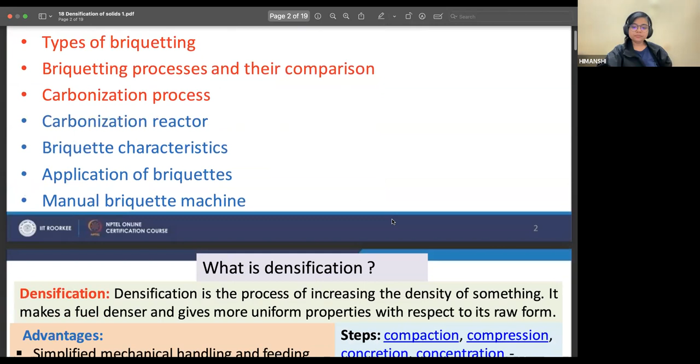So we will see what we learned in this week, and then we'll quickly jump to some basic questions which might help you in solving your assignment. So the first slide is basically densification of solid, and you have to help me out here. So what is densification? Can anyone brief me? What was densification? Anyone? You can type in the chat box, or you can unmute yourself and say.

Process of increasing the density. Okay, Rohan. And why do we need to densify, or why do we need to increase the density of the material with respect to the raw material? Any brief idea? What was the main reason for densification? To make it easy, ma'am, to process further. Yes, go ahead. Someone was saying something. Ma'am, it is just to reduce the logistic cost.

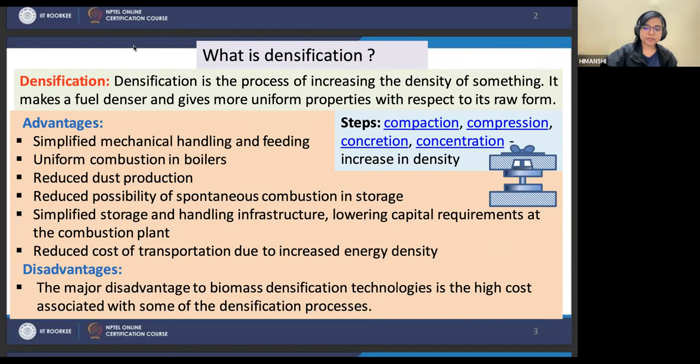And we know that some of them are very high quality machines, but as every high quality machine, they are very costly. Hence, we need to trade off between in which we need to put a major amount of money and in which we can compromise a bit, right? It's a very generic introduction for these things.

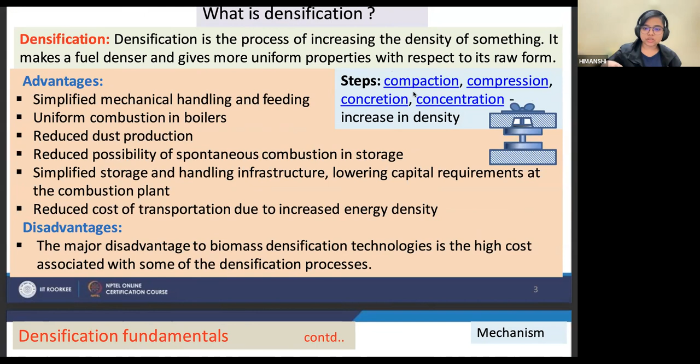So what is the mechanism of densification? Firstly, the first step will be compaction, compression, concretion, and then concentration, right? We will discuss everything in the coming slide. So the mechanism of densification is, can anyone tell me the concept behind densification? What happens when we are compressing or providing it high pressure? What is the basic principle behind it?

Why we are, yes, go ahead. Someone was saying something.

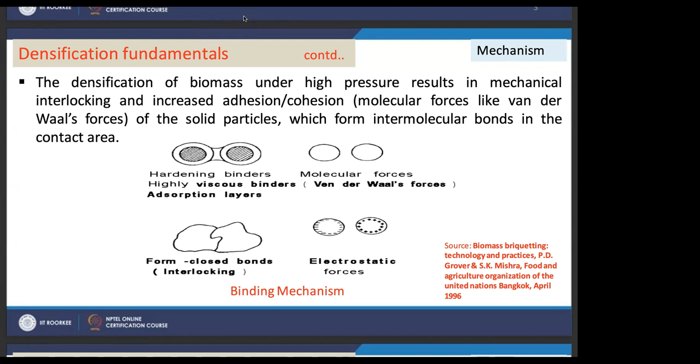Okay. So my question is, why or how does densification work? Suppose we have 1 kg of cotton and 1 kg of iron bar. Which is going to take more space? Will it be 1 kg of cotton or 1 kg of iron bar? Cotton. Cotton is going to take more space, right?

But if we put this cotton in a bag which is of dimension, suppose, 4 by 4, right? Similarly, the iron bar is also a bar of 4 by 4. So they both are going to take the same space at the end of the day. So what operations did we perform on the cotton for it to occupy less space? We pressurized it, right? We compacted it.

So what happens due to compaction or when we subject it to high pressure? The interparticle space, not intermolecular space necessarily, but definitely interparticle space reduces. We are excluding all the voids which are there between the particles, correct? So the densification of biomass under high pressure results in mechanical interlocking and increased adhesion and cohesion forces, such as van der Waals forces of the solid particles, which form intermolecular bonds in the contact area.

What are van der Waals forces? Can anyone tell me? And if you do not know how to explain it properly, just tell me whether it is a covalent type of force, or a non-covalent type of force? What kind of forces are van der Waals? And if you have no idea, please either raise your hand or text me in the chat box so that I can explain what van der Waals forces are. Okay, so no one is raising hand, which means you know what a van der Waals force is. So what are van der Waals forces?

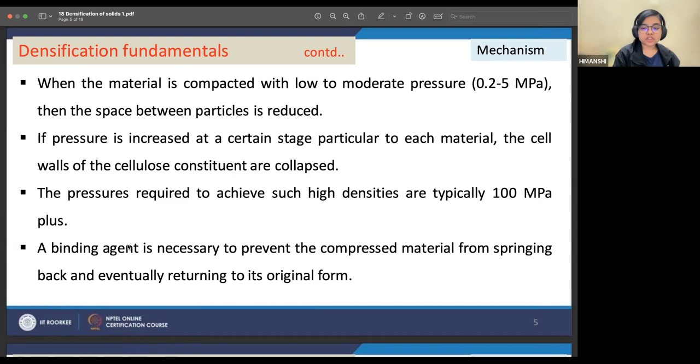If it is, suppose, agricultural waste, it has lignin, cellulose, hemicellulose, all those kinds of stuff in them, and these are basically carbohydrates. So if you're putting more pressure on them, due to the enhanced van der Waals interaction, they will interlock more efficiently in comparison to when the raw material doesn't have much organic content. Got it? Then the pressure required to achieve such high density is typically in the range of 100 MPa.

A binding agent is necessary to prevent the compressed material from springing back and eventually returning to its original form. Can you explain why a binding agent is necessary? Indirectly, I have given you the answer while I was explaining about the van der Waals interaction. Why would they spring back?

Any idea why we need binding agent for compressed material?

As I told you, during compression, two particles come close together and van der Waals forces increase. There are different types of van der Waals forces, and they are both attractive as well as repulsive. After a certain distance, the repulsive forces will be more in comparison to attractive forces. Hence, we need some binding agents to ensure that the repulsive force would not overcome the attractive force.

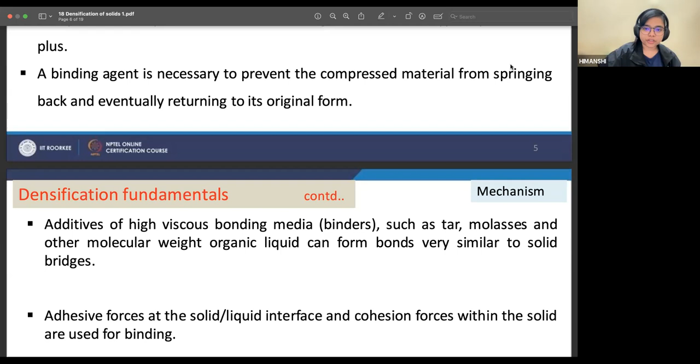That is why we need binding agents, and these binding agents, most of the time, are organic in nature with very high carbohydrate content. So additives of high viscous bonding media or binders, such as tar, molasses, and other high molecular weight organic liquids, can form bonds very similar to solid bridges. Adhesive forces at the solid-liquid interface and cohesion forces within the solid are used for binding.

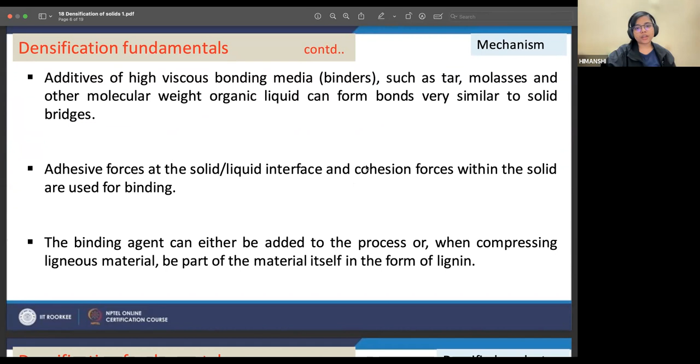I hope you guys are clear about adhesive and cohesive forces. Can anyone brief me what is an adhesive force and a cohesive force? You can text me in the chat.

These are some very basic terminologies which we study in chemistry at school level, maybe 9th, 10th grade. So what are adhesive forces and what are cohesive forces? I know you guys have an idea about it, so I want you to at least give it a try - what you understand from adhesive or adhesion and cohesive or cohesion forces.

Anyone? At least give it a try. Try to explain. And if you have no idea, then also at least raise a hand or something so that I can start explaining. You guys can hear me, right?

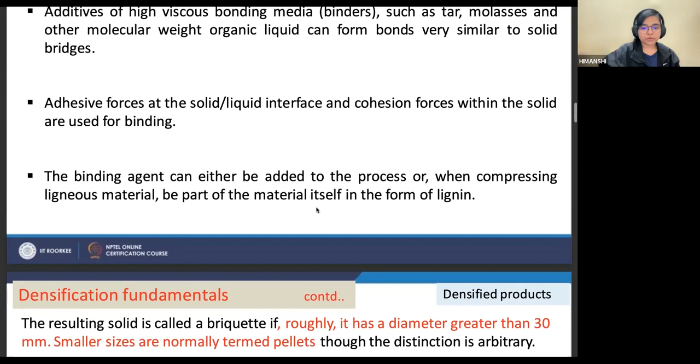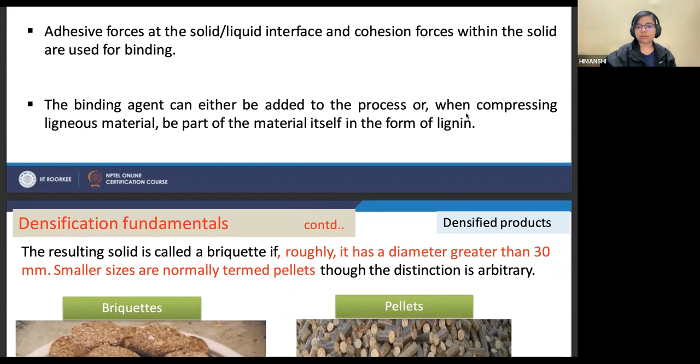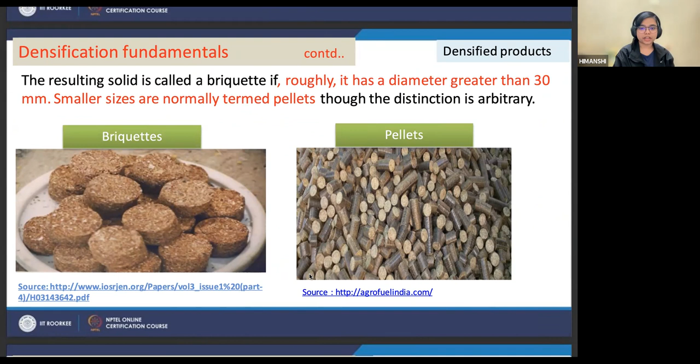So these were different types of densified material: one is briquette, the other is pellet. The difference between them is on the basis of diameter. Briquette has a larger diameter compared to the pellet.

So what are the factors which influence densification? Can anyone brief me? We have already discussed some of the properties, and those properties, at the end of the day, will affect the densification process, the material, and the action of densification.

The raw material which we are using will influence densification. What are the properties of the raw material? Since week one, we have been exploiting these properties, analyzing and measuring them to make the best use of what's available. These properties include moisture content, which we discussed in week one and two, as well as bulk density, void volume, and thermal properties.

The ultimate density of a briquette will depend to some extent on a range of factors, including, most importantly, the nature of the original material and the machine used and its operating conditions. We will discuss these conditions and the machinery, as well as other minor factors, in the coming slides.

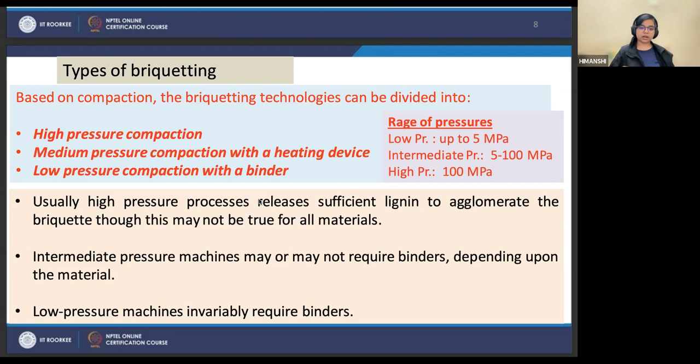Why do we need binders in low pressure compaction? Because we are not subjecting it to such high pressure that the molecules interlock among themselves. Hence, they have more tendency to move away or lose their integrity, resulting in a more granulated or powdery form.

It comes naturally: if you put more pressure on a material, you don't need binders, because the energy provided during pressing is enough for the molecules to stay in briquette or pellet form. When subjected to lower pressure, the energy isn't enough to sustain the briquette or pellet for a longer duration of time.

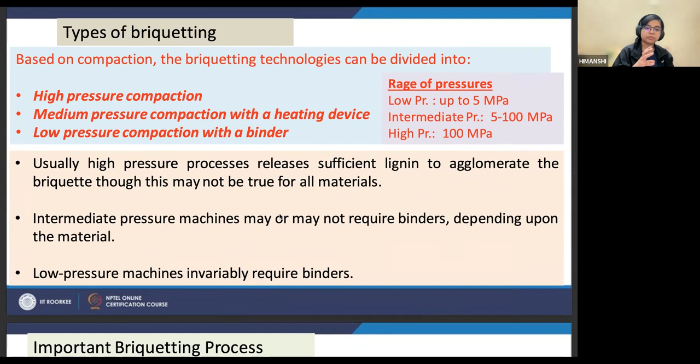Hence, to ensure that the briquette and pellet is in that form for a longer duration of time, we need certain binders. So similar things are mentioned here. Usually high pressure processes release sufficient lignin to agglomerate the briquette, though this may not be true for all materials, right? If it is the organic material, then definitely this will be true. If it is some other type of raw materials which are not organic in nature, which are not agricultural in nature, then it won't be true.

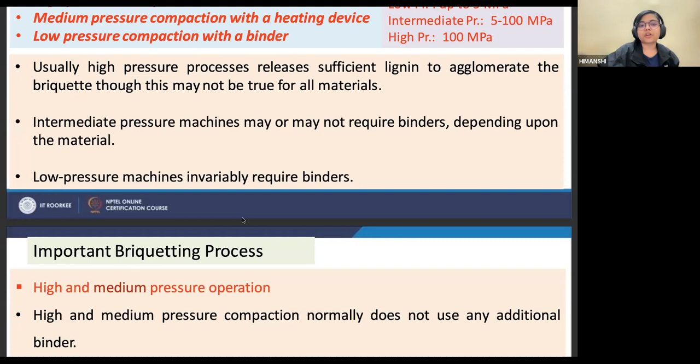Then intermediate pressure machines may or may not require binders, depending upon the material. Then low pressure machines invariably require binders, because we are not providing enough compaction for the briquette to sustain that shape and that density for a longer duration of time. In this, we are discussing some of the important briquetting processes, especially for high and medium pressure operations. So high and medium pressure compaction normally does not use any additional binder. We have discussed why it is obvious that we do not need to provide any external binders.

Second, normally the briquetting process is based either on piston press or screw press technology. So these two are the machinery which are there for generating briquettes, depending upon the high and medium pressure classification. Other briquetting technologies are less applicable in developing countries because of high investment. We have discussed that the only drawback of the densification process is the cost involved in this process and large throughput. So in this example, roller press and pellet mill are two machineries which cost more, but their throughput or output is also more.

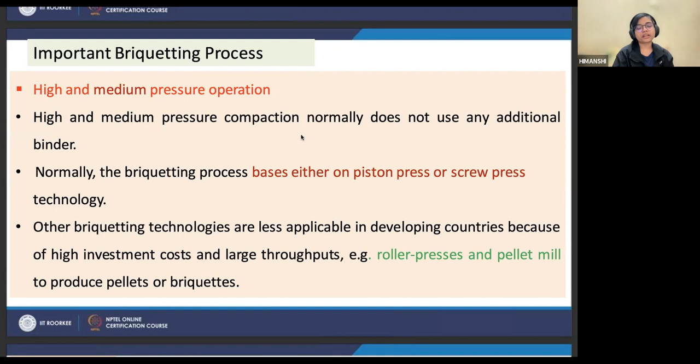But that output is not directly linked with the demand, right? Supply and demand. I hope everyone is aware of this basic phenomenon of supply and demand, right? If you want to get more price for something, and if the demand is more, you can always increase the price. But if the demand is low and you have high supply, you need to reduce the price so that at least you can get the cost of production of the material, right?

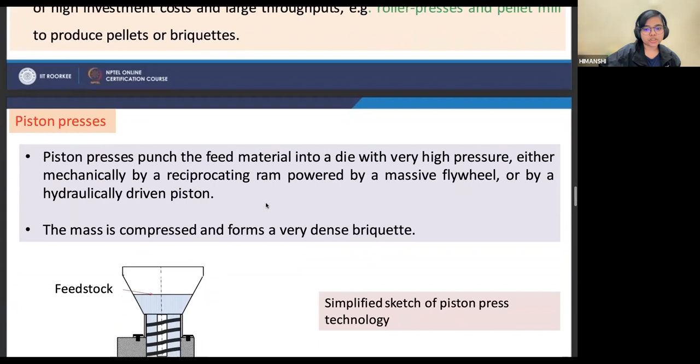So we will discuss one of the high pressure machinery, which is a piston press. So what exactly is a piston press? Can anyone brief me? What was a piston press?

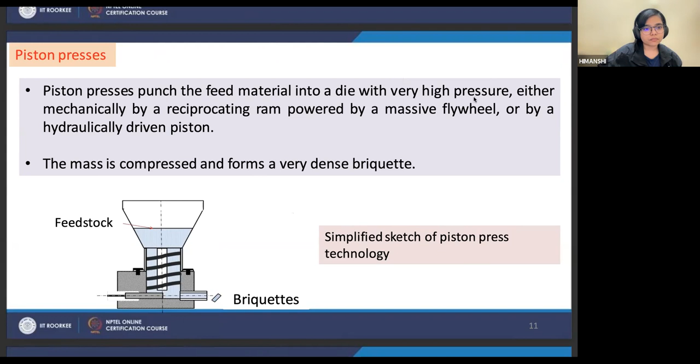Hmm. Okay. Am I audible to you guys? Can you guys tell me? Yes, ma'am. Okay. Deepak Kumar, I will suggest you to please leave the meeting and try to reconnect, because I guess majority of the people can hear me. So I think there is some issue on your side. This can be one thing. The other can be check your audio connection in the meeting itself. Yeah. So what was piston press? Yes, Saravanan. Do you want to say something? Saravanan, you have your hand raised up. Do you want to say something? Tell me, ask something. Okay. I think it was by mistake.

Yeah. So what is a piston press, guys? Anyone? It is very basic, very easy stuff. It is just a press which has piston-like action, and that piston can be either subjected by.

Okay, someone is texting me. Deepak Kumar, everyone can listen to me. That is why I'm suggesting you to leave the meeting and reconnect or check your audio connection. Everyone else can hear me. Yeah.

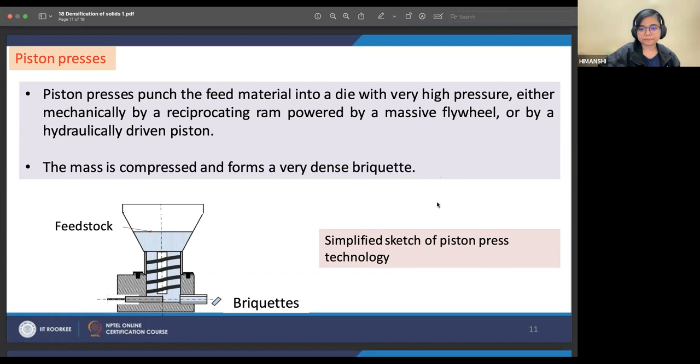So piston press. What is a piston, right? We know what is a piston, correct? We have seen many engines and all those stuff. So piston presses punch the feed material into a die. Die is basically a mold here, with very high pressure, because obviously we are studying densification, and densification is associated with high pressure. Either mechanically by a reciprocating ram powered by a massive flywheel or by a hydraulically driven piston. At the end of the day, it will be a piston which will be providing the high pressure. The mass is compressed and forms a very dense briquette.

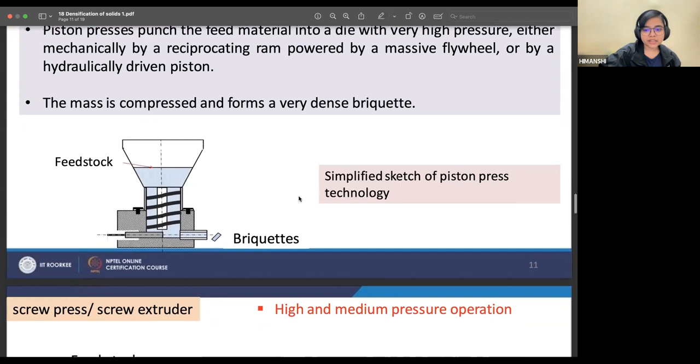And this is the simplified representation of the piston press. We can see here, the feedstock will be fed here, the pistons will be associated here, and irrespective of from where we are driving the piston, the pellets or the briquettes will fall from here. I will highly recommend you guys to go and search piston press on YouTube. There are very good videos out there, and you will see the exact machine, and it will help in your understanding and visualizing the machine.

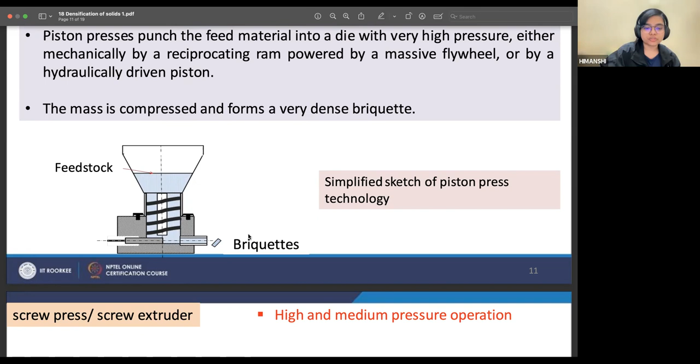But what was the drawback of piston press? There was one very big drawback of the piston press, because of which it is not used at large scale or for large scale industries. What is the drawback of a piston press? Anyone remembers?

Okay, if not, no worries. We'll see in coming slides what the major drawback was, and I hope that you guys will remember then.

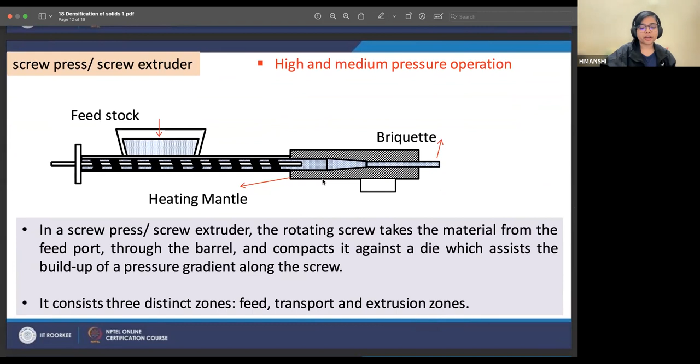The other was the screw press or screw extruder. Again, it was under high and medium pressure operations. This is the simplified representation of the screw press or screw extruder. In a screw press or screw extruder, the rotating screw takes the material from the feed port through the barrel and compacts it against a die, which assists the buildup of a pressure gradient along the screw, right?

As you can see, this is getting tapered at the end as we are moving from left to right, right? So as the area decreases, the pressure increases, and also we are providing heat, which will further enhance the pressure. And at the end of the day, the briquettes will come out at this end. This is also called a screw extruder.

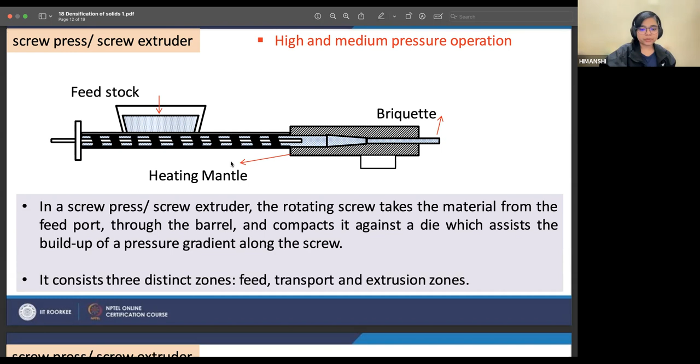So I don't know how many of you are aware of how the food product Kurkure is made. Okay, I think most of you have eaten a pack of Kurkure, right? They are not fried, right? They are puffed products, unlike other chips products which are fried. They are not fried, they are puffed products.

So in the food industry also, this kind of instrument is called an extruder. It's a very generic term for a machine. In that extruder the raw material, in that case the corn, wheat, all the masalas and everything, will be fed in here. The heat will be provided here and it will be passed through a very narrow nozzle like this.

The nozzle will keep decreasing, which will enhance the pressure and heat, and here the cooking of the raw dough, the material and the masalas will occur, and here we cut them at regular size. And as soon as they come out of the die, what will happen? They were subjected to high pressure; here they come to low pressure. Hence, the gases present inside the material will escape, leading to the puffiness of the material.

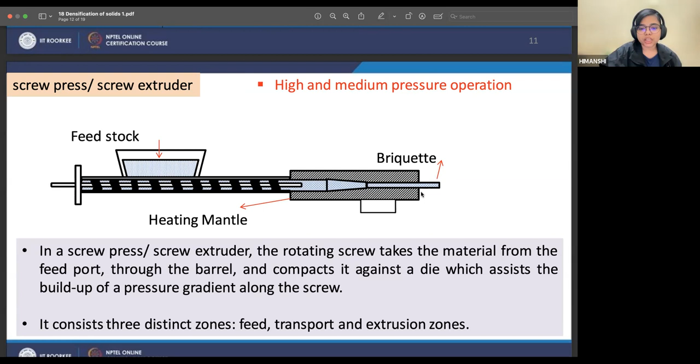So any puffed product you eat in future, always remember they are manufactured by an extruder. It is just a fact. I don't know how many of you knew it.

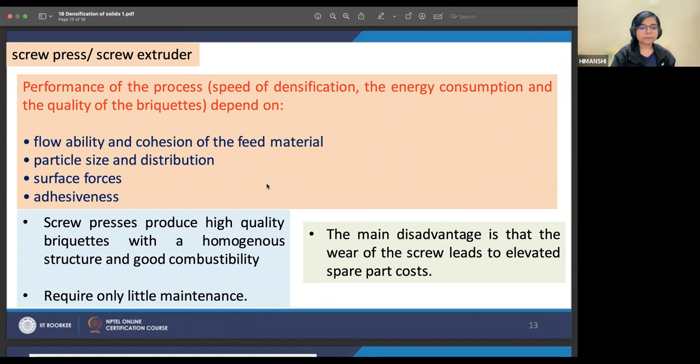Yeah. So for a screw press and screw extruder, the performance of the process, speed of densification, energy consumption, and quality of the briquette depend upon flowability and cohesion of the feed material, right? Particle size distribution, obviously, surface forces and adhesive forces. So a screw press produces high quality briquettes with a homogeneous structure and good combustibility, and requires only little maintenance.

But one of the disadvantages of the screw extruder or screw press is that wear of the screw leads to elevated spare parts cost. The screw is mostly made of stainless steel, in a screw or turbine-like manner. So if we are continuously using it, shredding will occur gradually because it is subjected to high heat also, right? High heat and pressure.

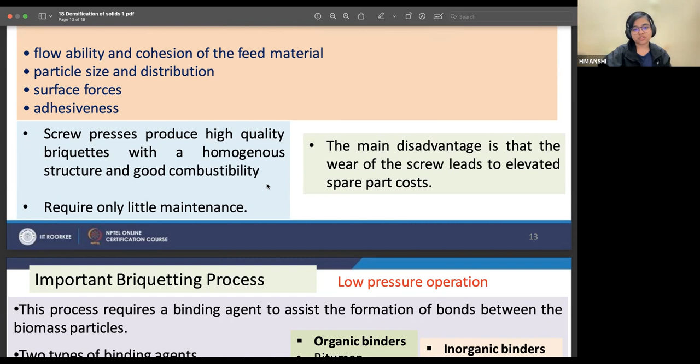They're not good for the material itself. So in the long run, the shredding will start, and hence you have to replace the screw at some point. And this adds extra cost for the machinery. So this is one of the disadvantages of the screw press.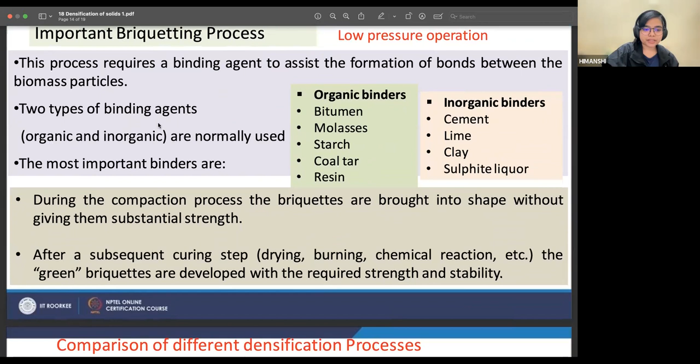Now we are talking about low pressure operations, right? This process requires a binding agent, as we discussed earlier, to assist the formation of bonds between the biomass particles, right? Two types of binding agents are present, organic or inorganic, as we have discussed. The most important binding agents or binders are organic and inorganic. These are the ones, right?

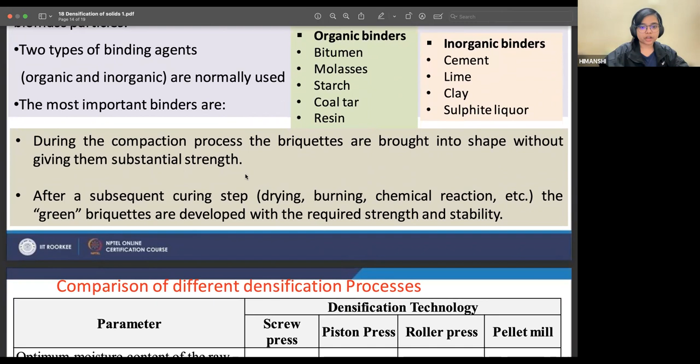So during the compaction process, the briquettes are brought into shape without giving them substantial strength, because we are not subjecting them to a high pressure. So after a subsequent curing step, the briquettes are developed with the required strength and stability. These are just some basic things.

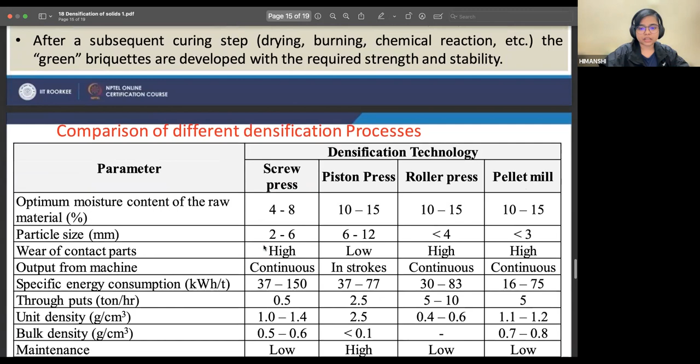So my question earlier, when I asked about the drawback of the piston press, right? It is written here. So can anyone spot what is the major disadvantage with the piston press? Anyone? High maintenance is the major drawback. But it is also in the screw press.

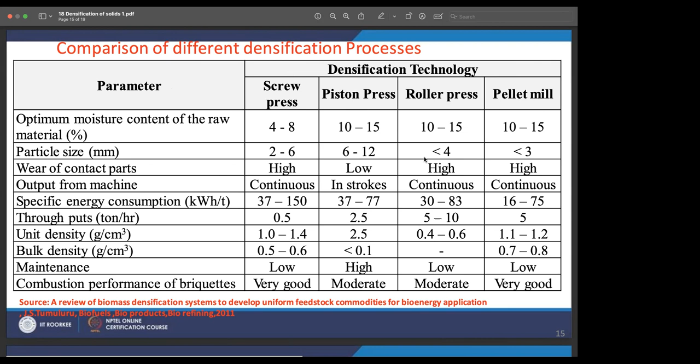Screw press, there is low maintenance. High maintenance. Oh, yeah. Sorry. I was looking for other things. For roller press and pellet mill, also some kind of maintenance will be required. But roller press and pellet mill are not for developing countries, right? Because they cost very high.

So among the machineries which are used in India or developing countries, which do not cost much, the one thing which we can say is the output from the machine. Because in industries, most of the processes are continuous processes and not batch processes. But the piston press gives the output in strokes, because when we are pressing the piston, the process will occur and the pellet or the briquette will form. While for the screw press, we are continuously rotating the screw and the pellet or briquette will form.

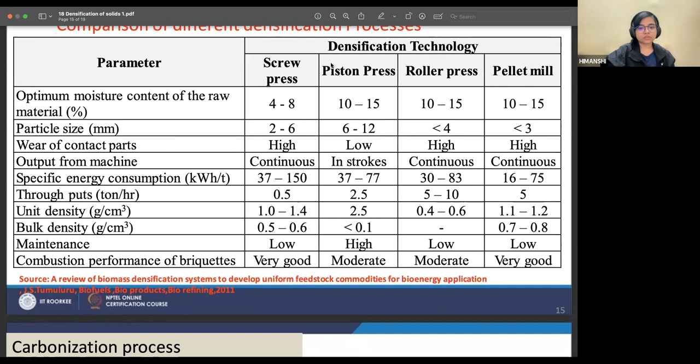So this is one of the disadvantages of the piston press, that it gives output in strokes or in batches in comparison to others, which give output in the form of a continuous process. And maintenance also, it is right. But if we want to run an industry, we cannot depend solely on a batch process when we have options like a process which can give us continuous output. So these are some of the brief comparisons between the screw, piston, roller and pellet mill.

Ma'am, I have a different say on this. Go ahead. See, why should we go with densification? It has certain advantages, but the major disadvantage is the cost, and we are just considering the economical cost of the finance. But the environmental cost is much more than the actual economical cost. So, is it really advisable to go for densification, considering the carbon footprint and the energy intensiveness?

Personally, what I feel is, are there any less energy intensive densification processes which we can adopt, especially for the Indian smallholder farmers or the small and marginal farmers, because there it is the need. We have to develop the technology or the machineries which are quite useful for the small farmers. This is my personal opinion, and definitely you will also agree with me. So, considering the environmental cost, we have to find some other alternatives. Will you please throw some light?

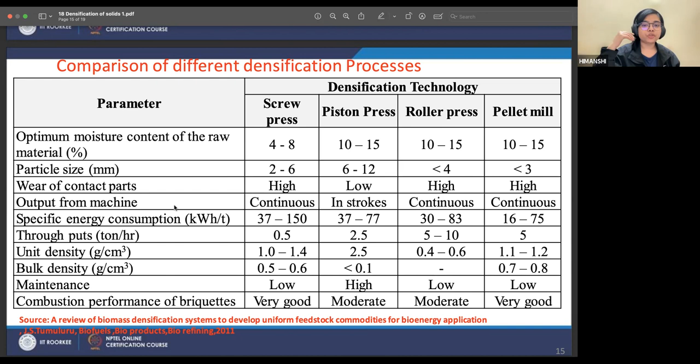So when you're talking about the cost, you need to look at the whole picture and not only the cost associated with that particular operation, right? Because at the end of the day, there will always be a trade-off. If you need higher quality, you need to put in more energy. But if you are compromising with the quality, you can also compromise with the machinery or the process which you are doing. It's directly related.

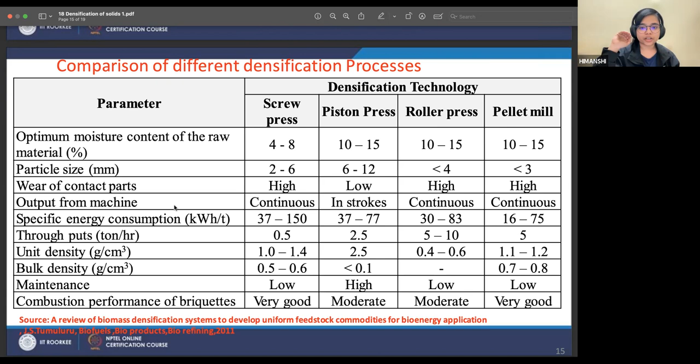Right? Yeah, I understood. Thank you. Yeah, no problem.

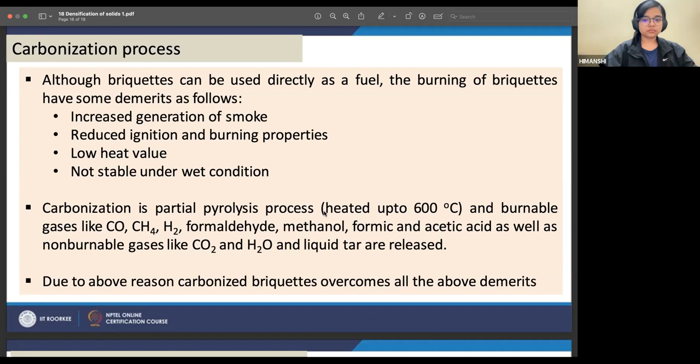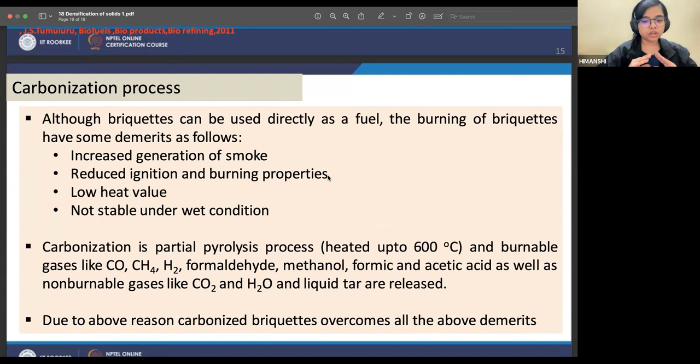So, what was carbonization and why do we need carbonization? Anyone? Anyone remember what carbonization was? Okay, so till now we discussed briquettes, right? Briquettes, at the end of the day, are just the pelleted, solidified raw material form having a particular dimension. So if we are burning it, there are certain disadvantages associated with the briquettes.

Some of the disadvantages are increased generation of smoke, because we have not subjected it to any other pre-treatment. Reduced ignition and burning properties, because we haven't segregated it that much. Low heating value; obviously, if they are heterogeneous in nature, it won't give us 100% of the energy the raw material is comprised of. And again, not stable under wet conditions. Why is it not stable under wet conditions?

Because these products are very much hydrophilic in nature, and by hydrophilic I mean water loving. You know salt, right? Salt is ionic in nature. So during rainy season, the salt gets clumped up. Why does that clumping occur? Because it absorbs water, it absorbs the moisture, and hence the clumping occurs. Similarly, other powdered or granulated forms of things absorb water because they have very high surface area through which water can enter. Same thing will happen for the pellet or the briquette.

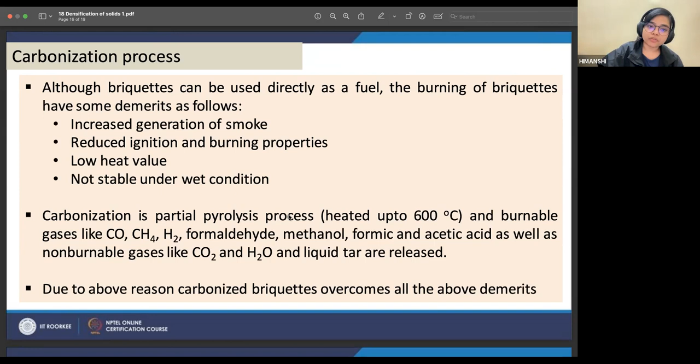So carbonization is basically a partial pyrolysis, and burnable gases like CO, CH4, H2, formaldehyde, and all these will be released when we pyrolyze the briquette. And with this, what will happen? It will give us more uniform heating of the briquette. It will provide less smoke, and it will absorb less water, right?

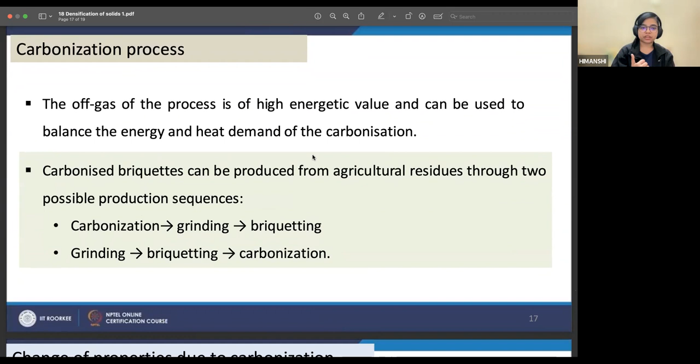So what exactly is the process? The off gas, again, whatever is generating, at the end of the day we need to use everything. So these gases which I mentioned here can be reused for giving energy to other unit operations, or even self igniting processes. There are two different types of carbonization processes for briquette.

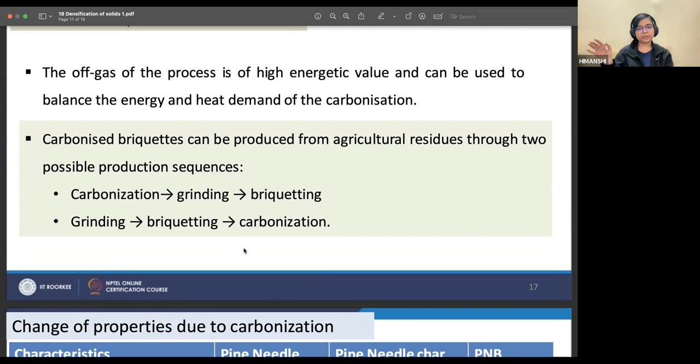First one is in which carbonization occurs, then the grinding will happen and the briquetting will form, which means the briquette at the end of the day won't have these commodities in them. Second process is we'll grind it, we'll briquette it with the processes which we have discussed earlier, and then we carbonize it, right? So this is the change before and after carbonizing the briquette. In the moisture content, we can see that they provide intermediate processes. Similarly with the mean ash content, volatile matter, as well as fixed carbon content, right?

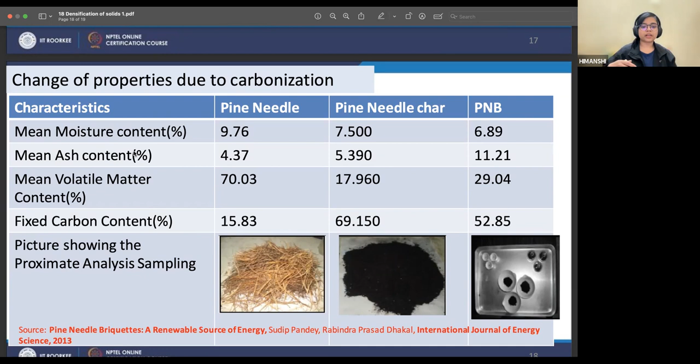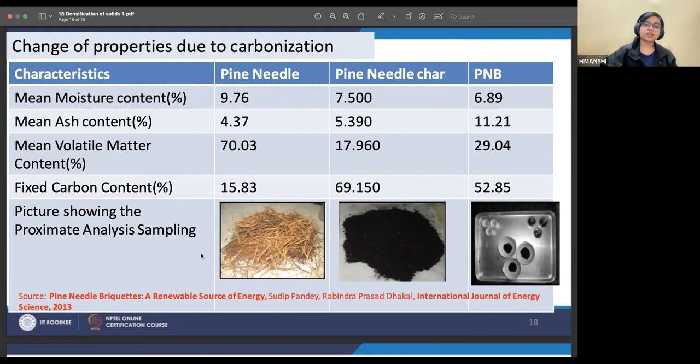These are some representative pictures, and I will highly suggest you guys to just Google it once. It will give you more. If we see things, we relate more to it. Just spend some time on the internet and search these terminologies. It will help you in learning, right?

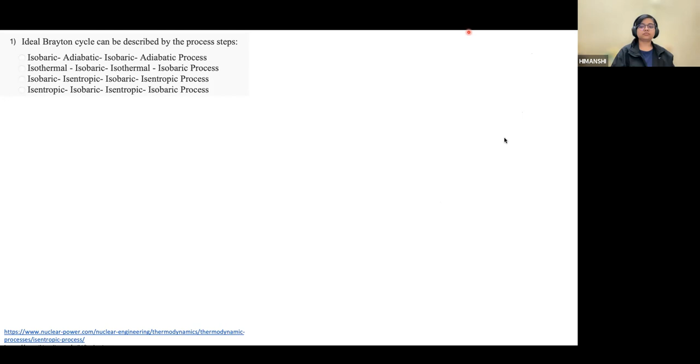Ideal Brayton cycle can be described by the process steps. I haven't discussed this part today, but I hope you guys remember. Okay, I have some answers. More answers, at least 50% participation. Yeah, at least try to attempt. Obviously, I will give you the answer, but more answers, please. I have received few answers. Okay,

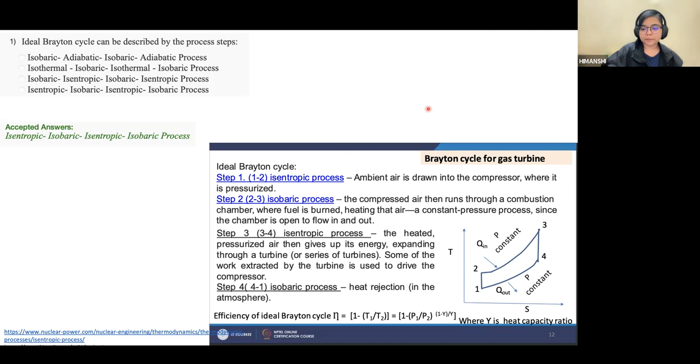the answer is isentropic, isobaric, isentropic, and isobaric. We are talking about the ideal Brayton cycle. If you remember when we were talking about this process, this Brayton cycle was discussed. Here the first step from first to second was isentropic. Second was isobaric. Third and fourth, again, isentropic. And fourth to first, it was isobaric. I hope you guys know these basic terminologies about isentropic and isobaric. And if not, then here are brief definitions for it.

So what exactly is the isentropic process? Isentropic is a thermodynamic process in which the entropy remains the same. While isobaric process is a process in which the pressure of the system stays constant. That is, change in pressure will be zero, right?

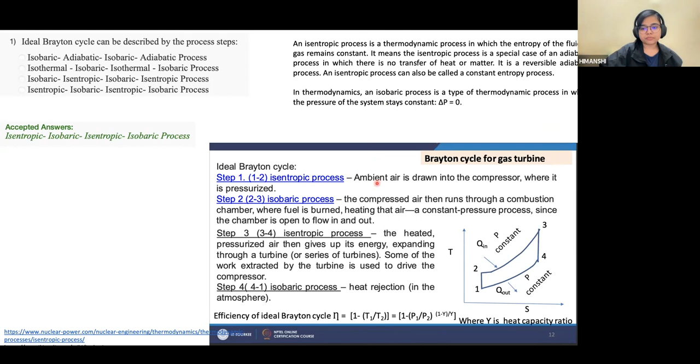Now, coming to next question. Arrange A, B, C in bottoming cycle. So what was this? Bottoming cycle, topping cycle, cogeneration, all those things, right? So I hope you guys remember. So what is A, B, and C? Is it furnace, heat recovery, and turbine in the following manner? Is it furnace, turbine, heat exchanger; furnace, compressor, heat exchanger; or furnace, heat recovery boiler, compressor?

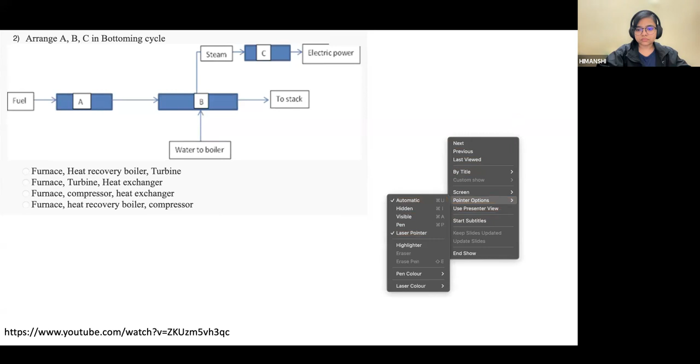Okay, I have few answers, few more. Even if it is wrong, don't worry, just try to attempt it and try to remember where you studied this, what was the context of it. Okay, few more answers. Try to attempt.

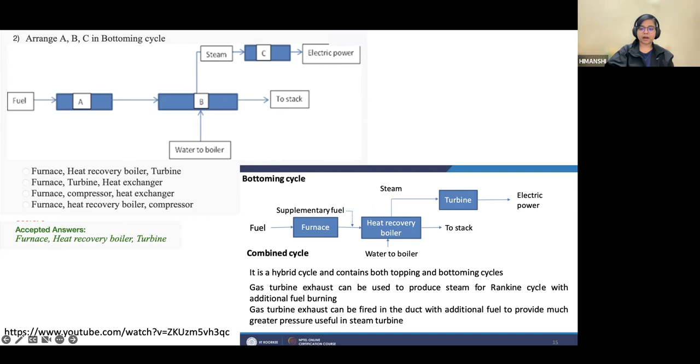Okay, the answer is furnace, heat recovery boiler, and turbine. I guess you guys gave the right answer. If you do not remember where you studied, this was the part of the slide where you studied about the bottoming cycle and the combined cycle. In this, we basically take heat prior to sending it to the turbine for the production of electricity and power. This was bottoming cycle, while topping cycle was we generate electricity and the power and then we subject it to the heat recovery operations.

The third one: the process for simultaneous generation of electricity, useful heating and cooling from the combustion of fuel is known as carbonization, densification, trigeneration, or cogeneration.

Okay, try to attempt it. And even if you do not know the meaning of exact terms, just try to relate to the things which are asked in the question and relate to the processes from their name.

Okay, I have a few answers. More - I guess people are a bit confused. I would like you to reread the question. There is one aspect distinguishing the processes which are confusing here for you guys: the process for simultaneous generation of electricity, useful heating, and cooling from the combustion.

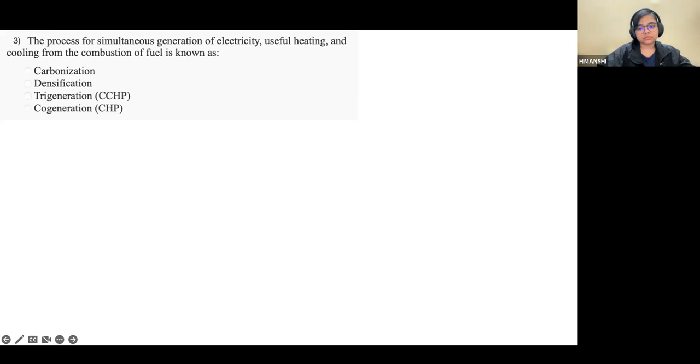Okay, the correct answer is tri-generation. For you guys who are confused between cogeneration and tri-generation, remember cooling was the aspect associated with tri-generation and not cogeneration. Cogeneration is having electricity, heating power, and then again heating, while tri-generation was also cooling it and then subjecting it to power production.

I will suggest you guys go back to the lectures because these are some of the things which are very less different from each other, and they are sources of confusion. So just go back to the lecture once, then it will be okay for you guys.

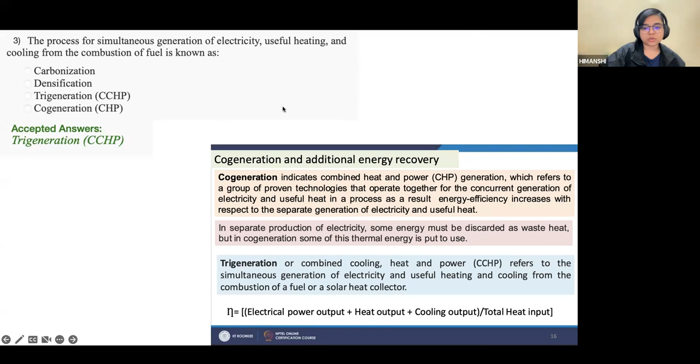The next question is based on compaction. The briquetting technologies can be divided into high pressure compaction, medium pressure compaction, low pressure compaction, or all of the above. This we discussed right before jumping to the questions.

More answers, at least this - yeah okay, I started receiving some answers. More answers, at least 50% participation minimum. We have discussed it today - this is the hint. And we have also discussed, as the name suggests, on what basis they are classified or divided.

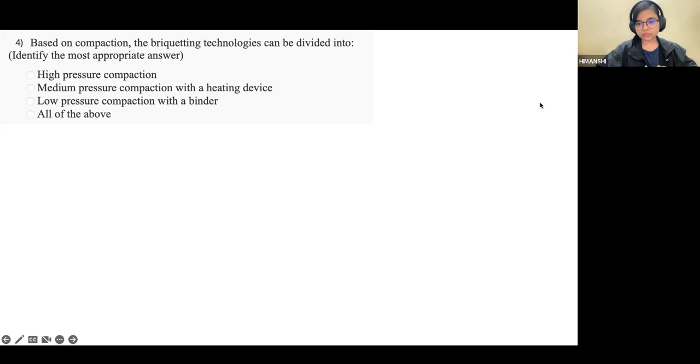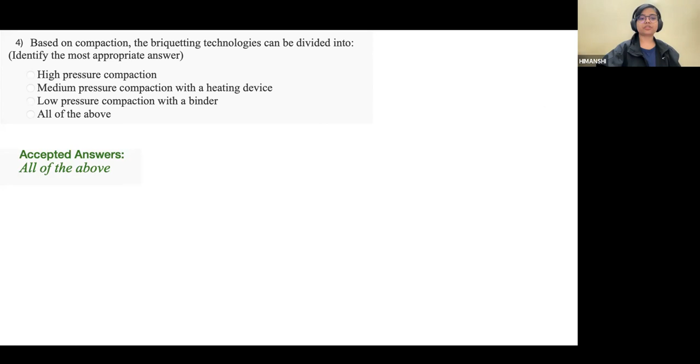Okay, the answer is obviously all of the above, as we have discussed high pressure, medium pressure, and low pressure. Low pressure was 5 megapascal, medium pressure was 5 to 100 megapascal, and high pressure was more than 100 megapascal.

Sorry, yeah, so you can look at the slide here, and also you have to remember the basic range, because you do not have to remember numbers everywhere, but you have to remember numbers and ranges where they are the criteria for classifying things. Here, the criteria for classifying is the pressure itself, so you have to remember the pressure range for high, medium, and low.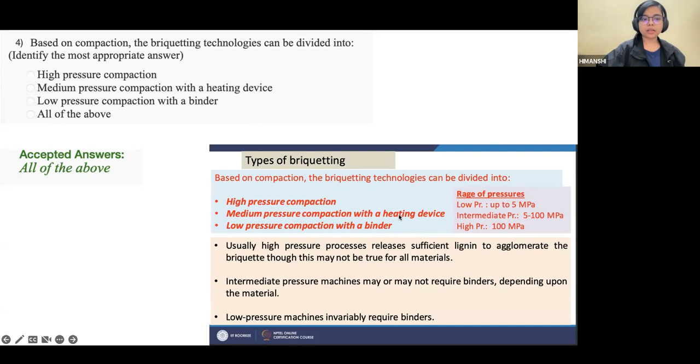Then we have discussed it today. Identify the briquetting process technology in the figure given below. Is it a screw press, piston press, rotary press, or none of the above?

Few more answers - yes, correct. And I will appreciate if you guys can tell me what were some key features, or just say what was the disadvantage of this process, because that is one of the biggest disadvantages of piston press, despite having a high pressure densification process.

I am repeating myself multiple times - it's not a continuous process, that's why it is. Yeah, I'm repeating myself most of the time and being redundant. I know this, but just to help you out, guys, so that things stay in your mind for a longer duration of time.

Because if we repeat, we tend to remember it well. Yeah, correct. So I don't think we need to discuss much upon it - we have discussed it earlier. It is a piston press, and you can go back to the lecture if you want to understand more of it. I will again suggest you go to YouTube and search piston presses, and you will get some live examples and live machineries, how they look and how they function.

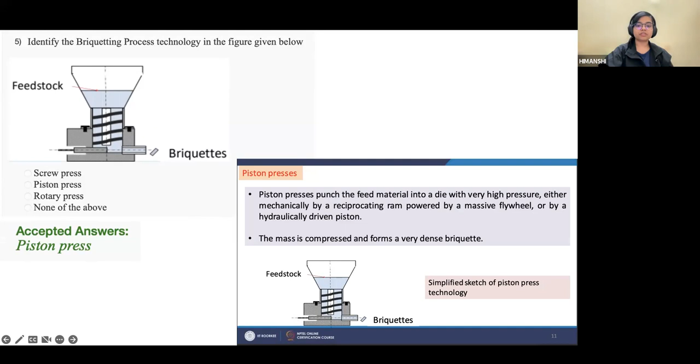So what does a friability index of 0 indicate? Is it adequate briquette quality, inadequate briquette quality, moderate briquette quality, or best quality briquette? We haven't discussed it today, but I hope you remember Professor Mandal's lecture.

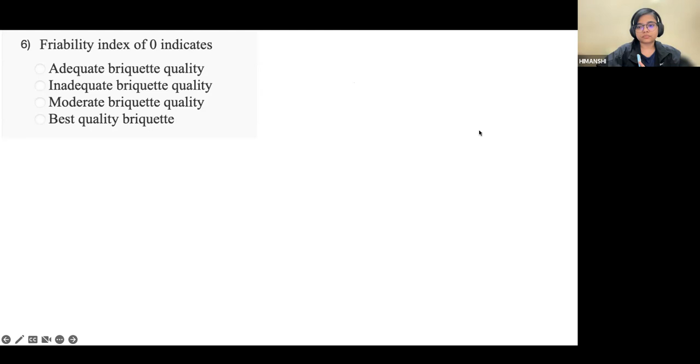More responses. Few more answers and then I'll tell you the direct answer. And try to remember what friability was also - what was the context of friability?

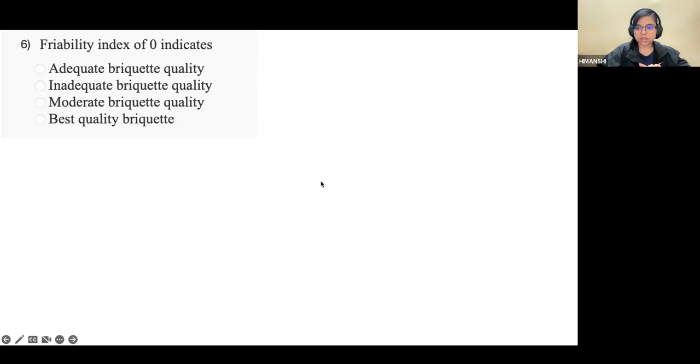The correct answer is inadequate briquette quality. For those who have said that it is best quality or adequate quality, just remember friability is the measure of the material which has not dropped from the sieve or which is retained in the sieve. So nothing is retained, which means everything is in the powdered form.

And hence we do not need such quality of briquette, because during transportation, what happens if we are transporting such kind of briquette - due to the transportation, what exactly... see, at the end of the day, we do not have highways and smooth roads and everything, right?

There is some mechanical stress always associated when we are transporting raw material, goods, or any other thing. So we need to make sure that our product is sustainable in such conditions. If nothing is retained, which means even with a little bit of shock the briquette is disintegrating, that is why it will pass through the sieve. So if nothing is retained, it will pass through the sieve. Hence, it is not at all sufficient for transportation.

And indirectly, we can say that it is not a good quality briquette. If you do not remember, just go through this slide once more and you will remember why the friability index of 0 is inadequate, while 20 is good quality. Why 20? Because we are using a sieve of 20 mm at the end of the day.

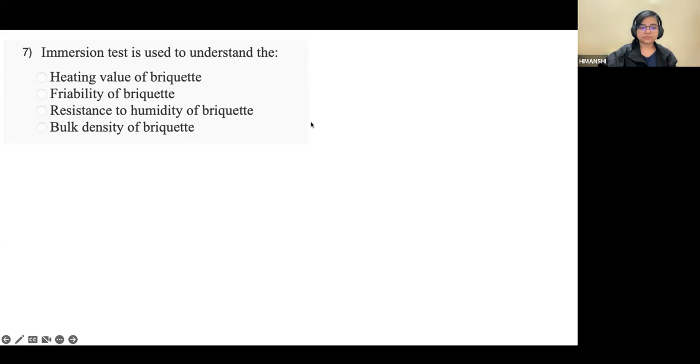The answer is resistance to humidity. If you remember the immersion test in the last part here, it was basically we are dipping the briquette in water for prolonged time and we are measuring the swelling or the elongation, and this is the criteria to judge whether the briquette is of good quality or not.

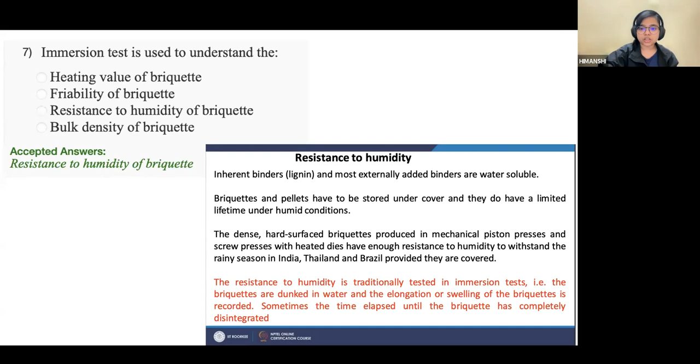Why do we need to judge the resistance to humidity? As I mentioned, during the transportation, the weather conditions are different. Hence, your product will be exposed to environmental conditions. Second, wherever you are storing your briquette or your product, the humidity or the surrounding temperature and all those conditions are not necessarily regulated. Hence, your product needs to be stable in those conditions. For such thing, we do immersion test.

Our next question is of numerical based type. These questions were discussed in the week 4 lecture itself. I will give you guys 5 minutes to try to attempt this question and then we will solve it together. Okay.

And if you guys do not remember the formula, I have kept it here. But for future references, I will suggest you to keep a separate sheet or at least notes in which you have all the formulas written somewhere all together so that it will be accessible to you guys. Now try to put the values and mold the formula according to whatever is asked here.

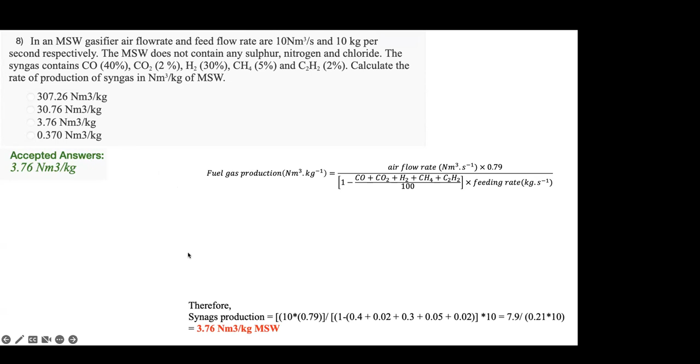Again, I'll give you guys 5 minutes for this. Try to attempt and remember what is the formula for pressure, and you will get to the end of this. Yeah, your time starts now.

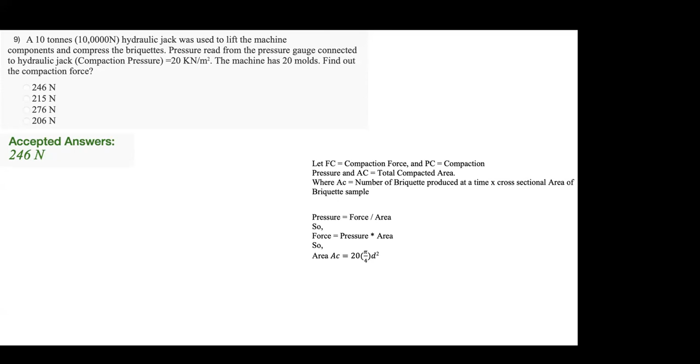As I said, pressure equals force upon area. So we need to calculate the force, which is pressure into area. Pressure for one compaction is 20 kilonewton per meter square, and the area will be pi by 4 into d square, since it's a circular sphere.

So it will be this: d is the diameter given in this formula, and pi value we know is 3.14. If you directly put the values in this area or force formula, you will get 246 Newton.

It was not a difficult question. You just need to know the relation between pressure and area. If we know the pressure or force generated by one mold, we just need to multiply it with the number of molds available in the machine. It was basic, you do not need to remember any particular formula, just a very generic formula.

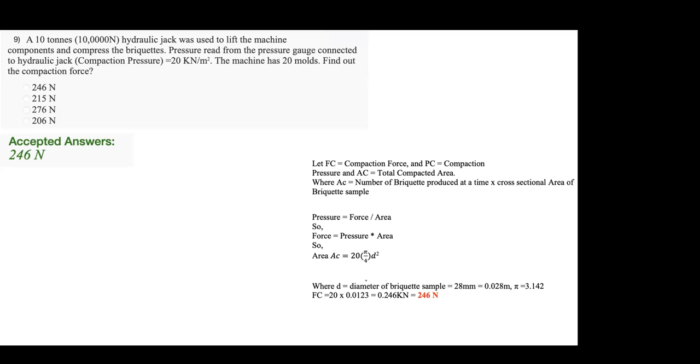So this is the last question for today. It's also a numerical type question, and it's a bit long, but not difficult. Again, you do not need to remember any particular formula, but know the concept of moles. That's it. You need to know the molecular weight of constituents present and the concept of mole.

The question says pine needle is used to produce bio oil in a slow pyrolysis unit. The percent of bio oil, char, and gas are 35, 40, and 25 respectively. The average molecular formula of the biochar is given, and for bio oil it is given. The composition of gas also is given. So we need to calculate the percentage of carbon converted to bio oil.

It's a bit of a long process, but remember we have the percentage of components, we have the molecular formula of the components, so we can take moles from these two given things. If we know the composition of gas, we can find the total carbon available from bio oil, char, and gas. If we know the total carbon available in these products, we can know the percentage of conversion.

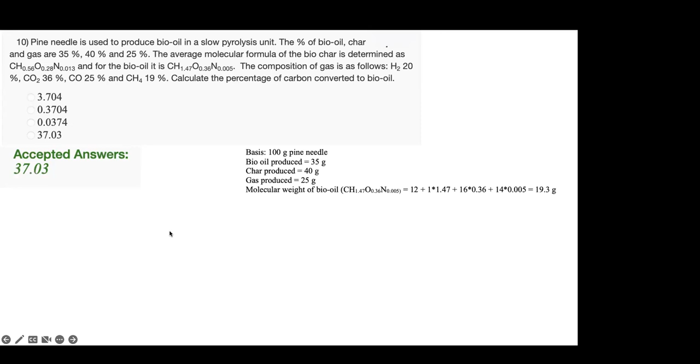Okay. So if you guys were going to give me answer fourth, then most of you will be correct, right? And as I mentioned, the basic thing which we need in these type of problems is that we need to know the carbon percentage at the end, right? So for carbon percentage, we need to know the available carbon to us. And for us, there are three products in which carbon is there: bio oil, char, and gas. And the content of all of them is given.

So our basis will be 100-gram pine needle because everything is in percentage. So we assume that everything will be like 100%, hence 100 gram. So bio oil is 35 gram, char is 40 gram, gas is 25 grams, right? The molecular weight of bio oil will be, the bio oil constituent is given as this formula, right? CH 0.56, O 0.28, N 0.013.

So what will be the weight of this? Carbon weight, which is 12, plus hydrogen weight, which is 1 into 0.56 times, plus oxygen weight, which is 16 into 0.28 times, plus nitrogen weight, which is 14 into 0.013, right? And then similarly for the char and all those commodities. So first we'll talk about the bio oil, which is given here. So the bio oil weight will come around 19.3.

We have the weight, right? And we have the weight available to us, or the produced weight. So we can calculate the moles. Thus, 35 gram of bio oil will be 1.813 moles. Correct? Similarly, with the char, the molecular weight of char can be calculated similar to the molecular weight calculated for the bio oil, which will come around 17.2 grams, right? And char available to us is 40 grams. So the moles of char will be 2.323 moles, right?

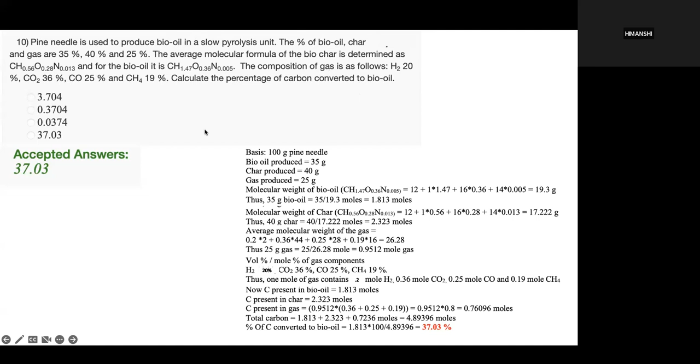And if not, I will highly suggest you guys come and attend tomorrow's lecture also. And if you're not understanding some concepts or certain things, go back to the lectures, try to understand. Otherwise, you can write to us.